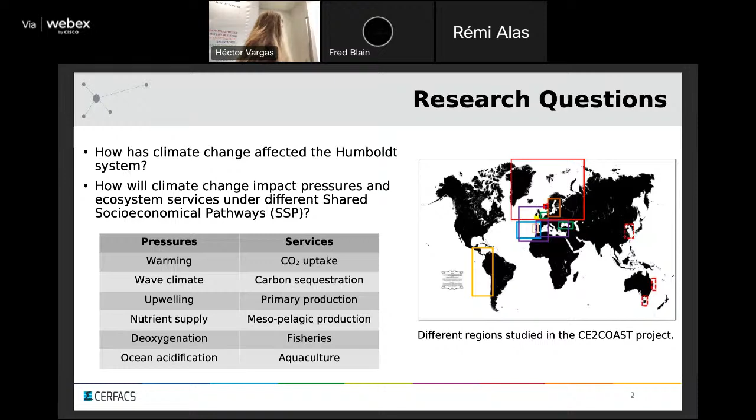Finally, I'm going to show you some more recent results on CO2 response to ENSO. So what this figure shows is during El Niño extreme events, we have the E index, which corresponds to the Eastern Pacific index, and CO2 partial pressure anomalies.

These data correspond to the CESM-LENS ensemble models, 35 different realizations. So what we have in the solid line is the ensemble mean, and the shading corresponds to the 25th and 75th percentile of the distribution. As we can see...

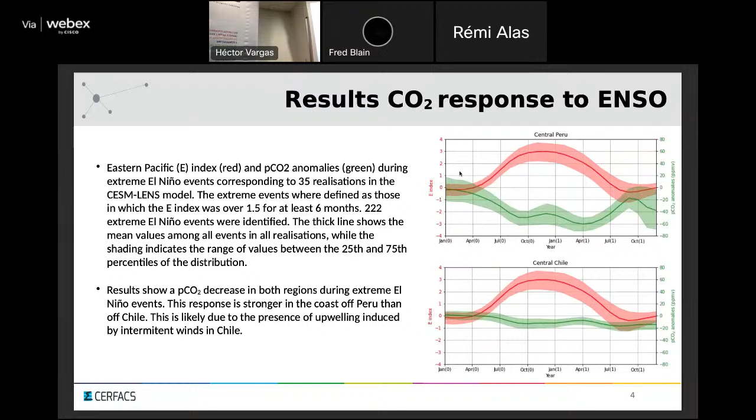During El Niño extreme events, CO2 concentration decreases, as we would expect since upwelling stops. However, we see that this reaction is stronger in Peru than in Chile, and this is most likely because in Chile there are intermittent winds that still induce some upwelling. And so this is the end of my presentation, thank you for your attention.

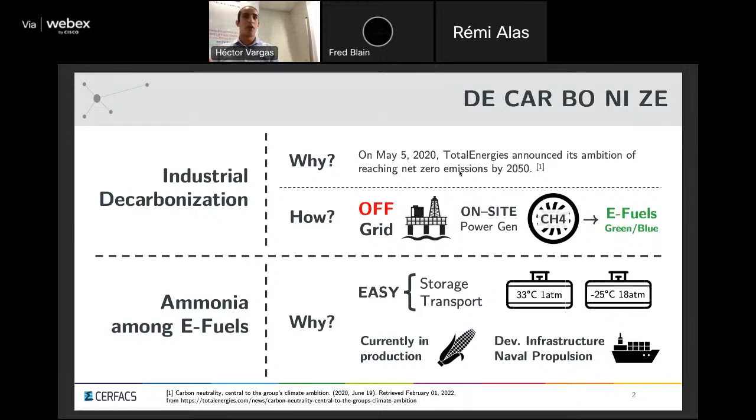And how do we do it? We need to transition from methane to ammonia-hydrogen mixtures. How do we do this? Well, first, one of the first challenges we face is that the literature on ammonia and hydrogen is scarce but very active, so there are papers coming out every 2 or 3 weeks, but we don't have a history. We are setting the foundation in the last years.

Another thing is that we need to choose a mixture, because as Jessica told us earlier today, you cannot burn ammonia by itself, it's not reactive enough. So you need to mix it with more reactive fuels like methane or hydrogen.

So you have 2 options. You already have a fleet of turbines existing on the platforms, so you can either reuse them and adapt them, or you can redesign the whole turbine.

If you decide to reuse the ones that exist already, you have 2 conditions. You have to reproduce the methane behavior, and you also need to have a mixture issued from cracking NH3. Cracking is a procedure where you take a certain amount of ammonia, crack it, and convert it into an ammonia, hydrogen, and nitrogen mixture.

When you want to retrofit your gas turbines, you have to take into account these two parameters. And if you redesign completely your turbines, you can get rid of the reproducing-methane-behavior constraint, but you need to pay the price to replace all the existing turbines.

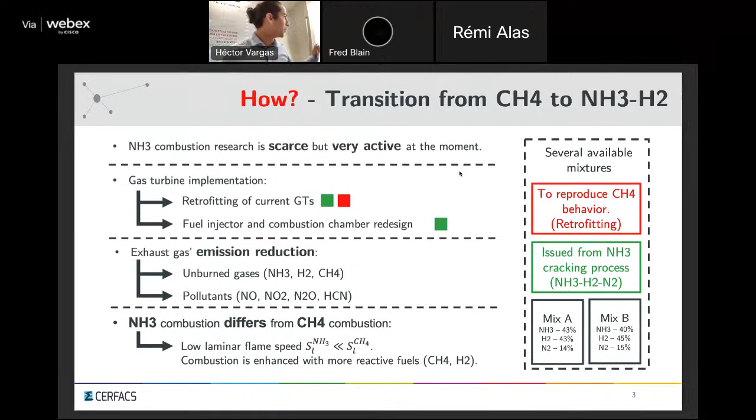My current objective is to implement a chemistry into our CFD LES code, which will be valid for several compositions, several pressures and initial pressure and temperature. We will study the transport of the species and the reaction between them. After validating the models, we will choose the one that's more adapted and suits us better.

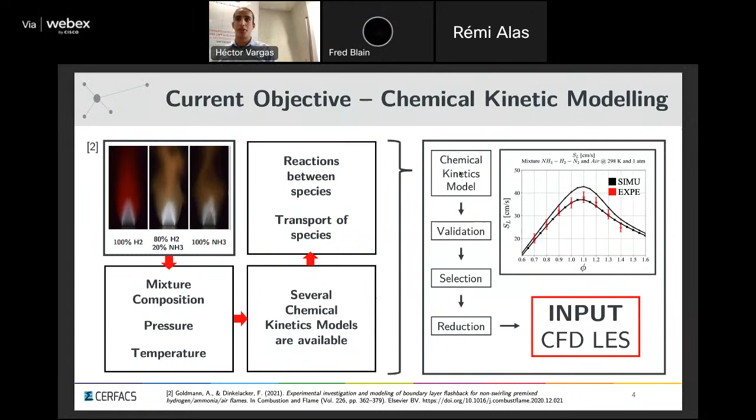Then we will reduce it. We will take out the reactions that aren't that important, that do not contribute to the combustion details we want to capture. And then we will introduce this reduced, simplified scheme into our CFD LES simulations.

After this, we will implement this chemistry and modify the existing turbulence combustion model to take into account our several multi-fuel case.

And we will also analyze the conjugated heat transfer using the AVTP solver. And in the end, we will end up with an adapted version of the AVBP solver and a demonstration of our model in a real configuration.

Which will be then used by TotalEnergies to decide whether they want to keep their turbines and adapt them or buy a new one, or which is the most interesting mixture for them in terms of cost and combustion characteristics.

And the first CFD LES simulations we've done are on a simplified bluff body burner, which we can see on the right side of the slide.

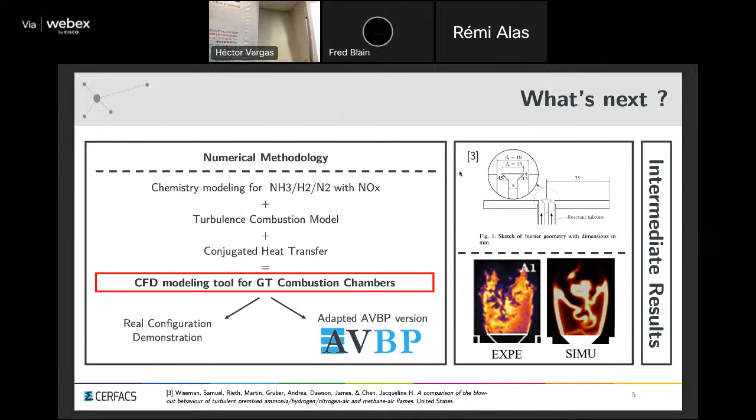Hello everyone. My name is William Montolin. I'm a first-year student at the GLOBC team, and today I'm going to present my topic entitled Improvement of the Representation of Living Fuel for Fire-Atmosphere Coupling. This topic I'm doing under the supervision of Mélanie Rochoux and Patrick Le Moigne for CNRM.

Today we are going to talk about fires, but not the same kind as you CFD guys, but wildfires. Even though wildfires are part of nature, they can be deadly, destroying homes, wildlife, and polluting the air with harmful emissions.

With an increase in temperature and droughts, they are becoming more and more worrying. I showed you here as an example the area burnt between 2019 and 2021 by fire with a surface of more than 40,000 hectares, which we call the mega fires.

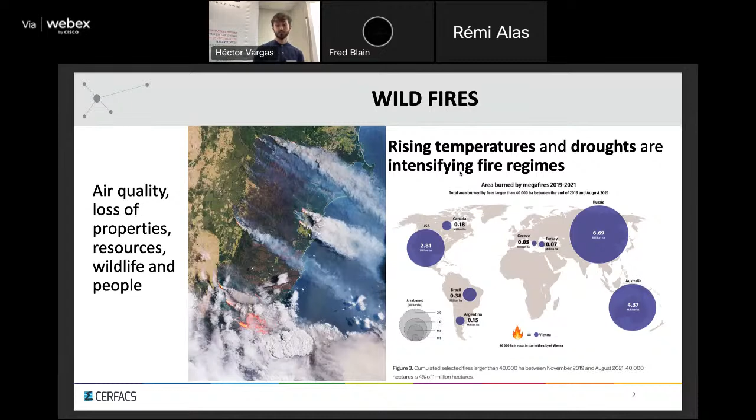These events are out of control for firefighters, and predicting their spreading is not an easy task because there is such a complex and rich physics involved.

Mainly, we are modeling this through the interplay between fire and atmosphere, where you have the fire heating up the atmosphere, giving rise to a strong convective flux. And at the same time the fire is spreading at the ground at a certain speed, and this speed is depending on the surface wind from the atmosphere.

So there are a lot of regimes existing depending on the convective flux number. You can have either a plume-dominated fire or a wind-dominated fire.

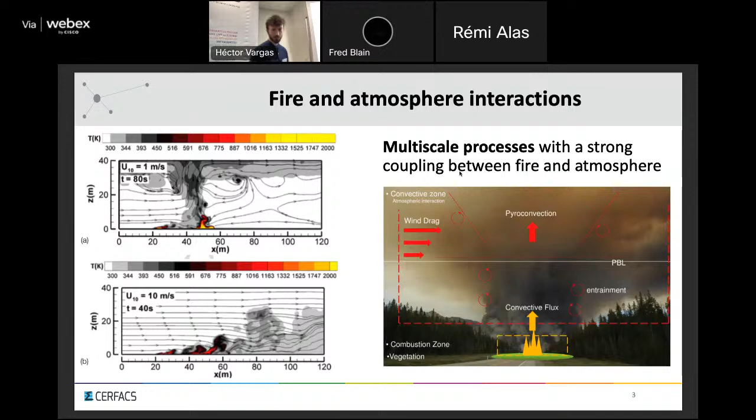By trying to recreate this complex physics, Blaze was developed by Aurélien Coste during his PhD for the fire part. His model was then coupled with Meso-NH large eddy simulation for the atmospheric counterpart. The coupled model Blaze Meso-NH was then compared to an experimental case and showed in particular two things.

One was the importance of atmospheric variability due to turbulence, and the second was the appearance of compressible effects at 10-meter resolution. This was done for a homogeneous vegetation, or fuel, if you want to say.

Our goal during this thesis is to extend this case to a more complex vegetation, to have an even more realistic case. To do that, first we need to correctly represent the drag that the vegetation has on the fire spreading, by representing the type of profile that the wind has.

And secondly, we need to recreate behavior from the fuel depending on the characteristics of the vegetation. With these two ideas combined, it will help us evolve toward more real cases.

Such as this one, which is the New Jersey case, a pine forest with a very broad range of vegetation and complex fuel. Thank you.

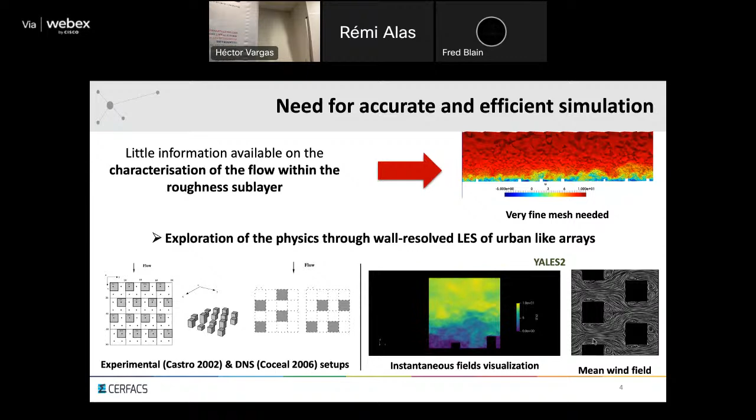Now that we know our tool is working well, we are focusing on finding the relevant variables which are influencing our flow. Of course, as you can see, the pattern of the array is one of them, but we can also think about the wind direction, the form of the obstacle, the density of the obstacle inside our domain, and I bet you can think about many other things.

We aim in this PhD at taking advantage of such a high variable space and complex flow pattern using neural networks and random geometry databases to create a wall stress model of the roughness sublayer, and maybe later to extract the dynamics of the flow to provide accurate prediction of pollutant dispersion.

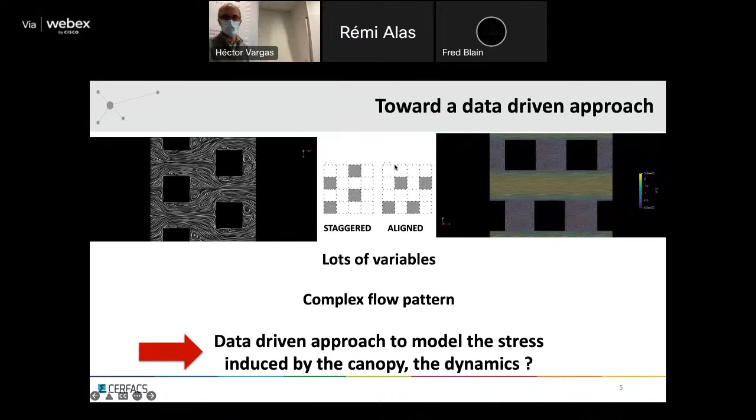Thank you. We now go back to Mehdi. So we talk about wall modeling again.

Hello everyone, my name is Emilio Concha. I'm a first year PhD student here in the CFD team, and my topic is wall modeling for large eddy simulations of turbulent flows. So a bit of context.

So I'm dealing with large eddy simulations in which we need to simulate the largest and most energetic structures of the flow. However, one limitation is that when you are nearing the walls, the structures you need to resolve are smaller and smaller. So it calls for a fine enough mesh, and that means a high computational cost.

One way to avoid it is to use wall models that will model for you the fluxes at the wall. Then you can compute on a coarser mesh, and it avoids a lot of pain for you.

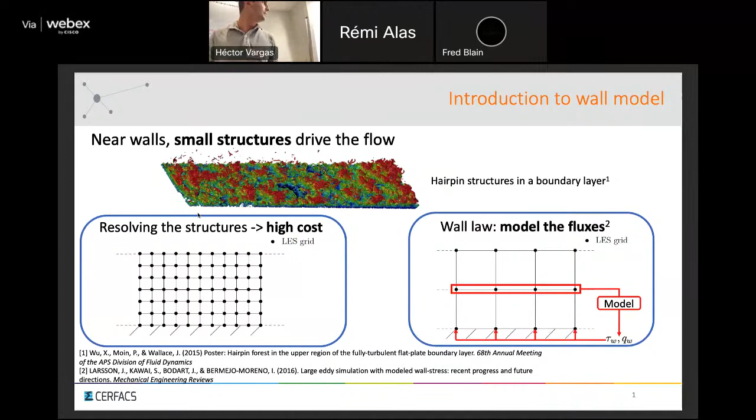However, the challenge we have is that here at CERFACS, we want to model quite complex flows, such as turbomachinery flows, and there are complex phenomena at stake. For example, there is pressure gradient in the boundary layers. Also, they can have shock-wall interactions and boundary layer transitions, and most of the phenomena are also non-stationary.

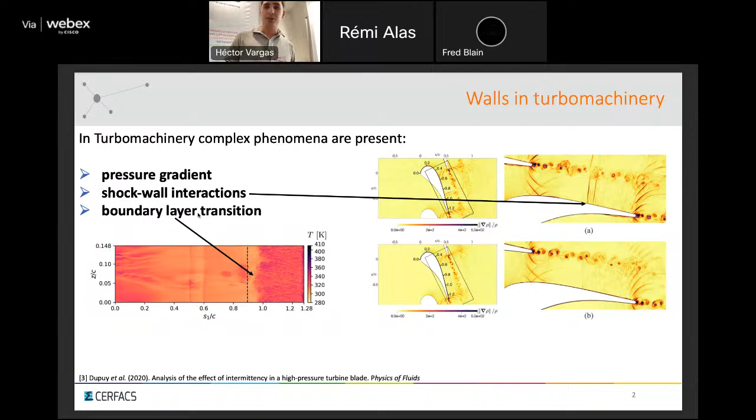One contradiction is that the most widely used wall law is based on the classical and historical log law, which relies on restrictive hypotheses, such as flat plate, stationary flow, and no pressure gradient. However, it is quite efficient to compute with, so it's still used.

But the whole idea of my PhD is to try and improve this law in our solver AVBP, and we hope to have better predictions for our turbomachinery flows with that.

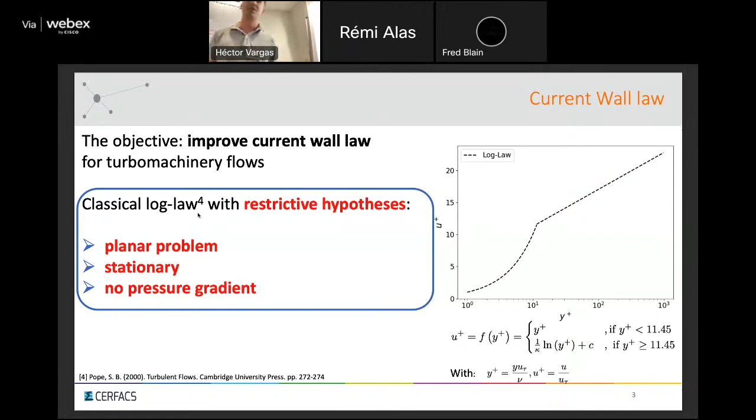So what I did up to now is I implemented in AVBP the thin boundary layer equation model, which relies on solving an ordinary differential equation in the first cell of the mesh. And it has a pressure gradient embedded in it.

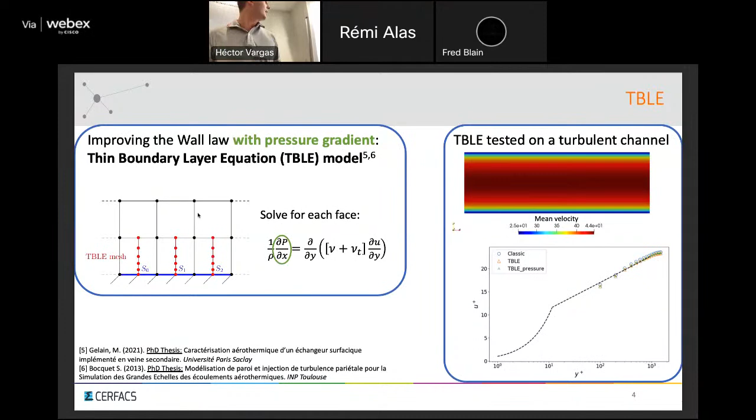For now, I tested it on the turbulent channel just to know if it was behaving as we wanted it to in a controlled environment. And that's the case. The work in progress is trying to test the TBLE model on a diffuser case or other cases where the pressure gradient is known to have an effect on the flow.

I'm also trying to see if other wall models can be considered, especially trying to include the non-stationary effects in the models to better couple the LES framework with the wall models, which are based on RANS equations now. So that's all for my talk, and if you have any questions, you can ask them.

Next speaker is Rashid, and you will be talking about hybrid physics AI approach for cloud cover.

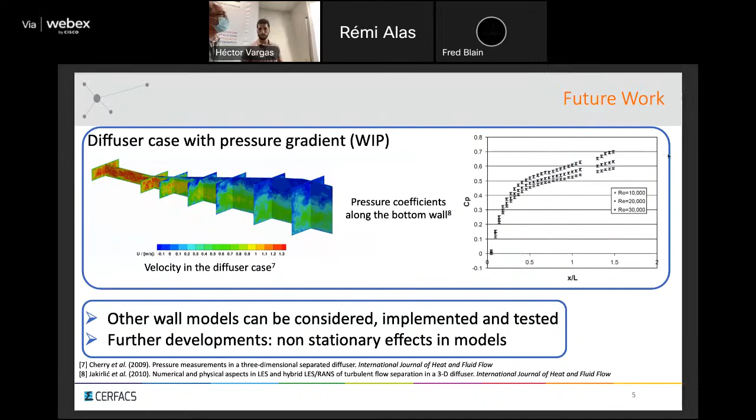Hello everyone, my name is Rashid Elmontosir, and my PhD subject is hybrid physics AI approach for cloud cover nowcasting. I'm supervised by Olivier Pincourt and Corentin Lapayette.

The idea of cloud cover nowcasting is given the last observations, to predict the next cloud states. Oh, it's not working, it's an animation. Anyway, it's actually an animation, but anyway.

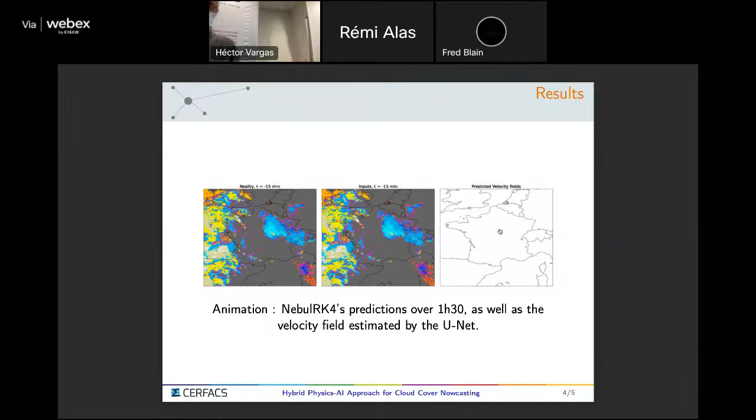So the next and final talk for this session is Riwan, right? That's how you pronounce it. So it's about control of laminar transition.

So the industrial interests of this topic are the reduction of fuel consumption, especially for civil aviation, and the reduction of thermal protection constraints for future hypersonic aircraft.

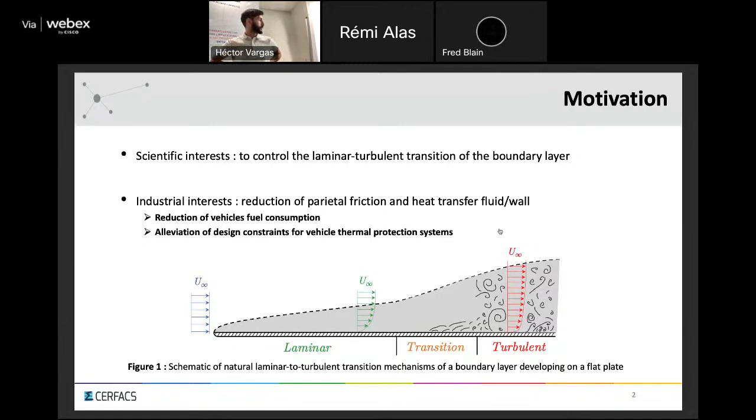The natural transition of a boundary layer consists in the linear development of primary instabilities until certain amplitudes, past which nonlinear interactions become predominant. The so-called secondary instabilities then lead to the breakdown to turbulence, that's to say the apparition of turbulence spots that grow and multiply until the boundary layer becomes fully turbulent.

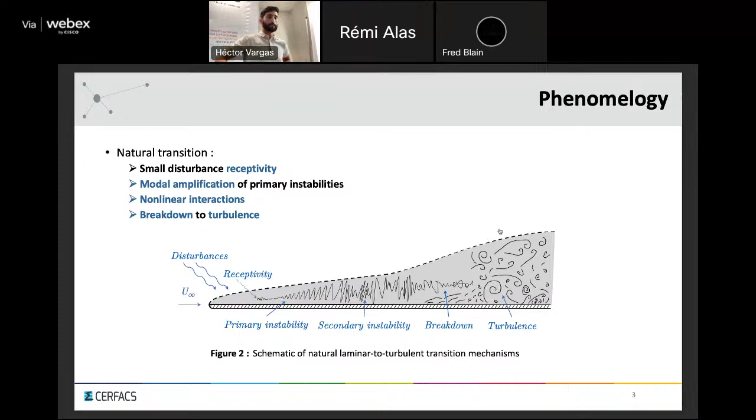Consequently, the attenuation of these primary instabilities can allow us to delay the transition. To achieve this attenuation in the subsonic regime, we can use suction through a perforated wall. This will make the boundary layer profile fuller and less prone to destabilize the Tollmien-Schlichting waves in this flow regime.

For the hypersonic regime, it's different. The second Mack mode is the dominant disturbance that can make the boundary layer turbulent. This disturbance represents a high frequency trapped acoustic wave within the boundary layer.

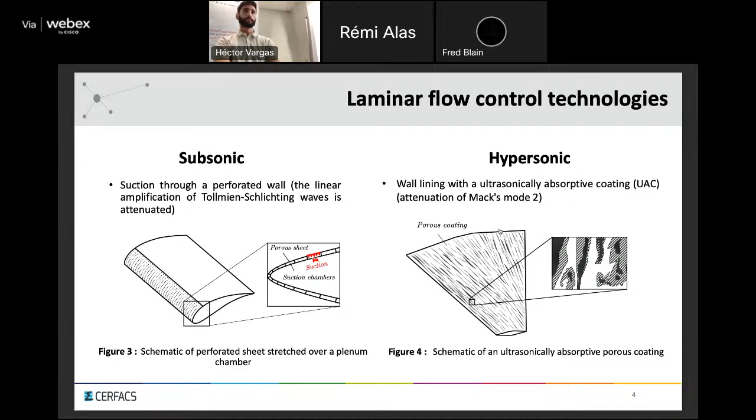The resonant nature of these instabilities is sustained by the wall acoustic impedance. So covering the wall by a porous coating can allow us to delay the transition by attenuating the Mack second mode through absorbing the acoustic energy.

So the objectives of this thesis are to study the modal and nonlinear amplification of instabilities within subsonic and hypersonic boundary layers by performing DNS with Jaguar.

Then we want to assess the effect of control systems on the development of instabilities by modeling the effect of porous walls with temporal impedance boundary conditions, and eventually couple this boundary condition with wall suction for subsonic cases.

And then we want to improve the performance of control systems by using optimization algorithms to evaluate the properties of especially inhomogeneous porous materials. Thanks for your attention.

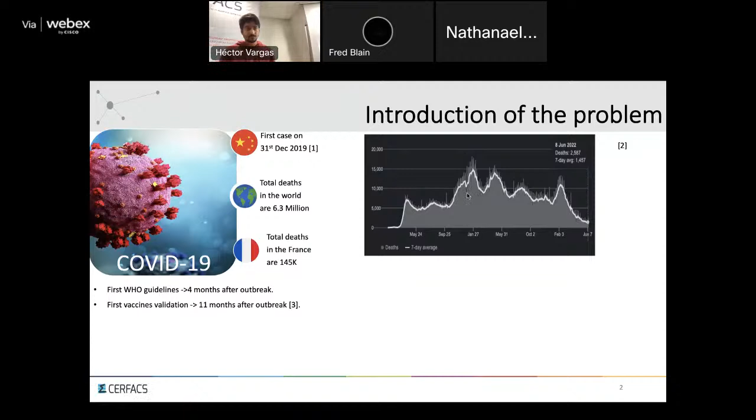So why did this happen? Is this the first time we had a pandemic with an airborne virus? Not exactly, because we had some airborne viruses in previous history which were catastrophic for mankind, such as rhinovirus, influenza, and human SARS, etc. There are actually studies on these. Despite having studies, we still came up with this current situation. Then what is the problem?

The problem is that the World Health Organization, actually the entire world, reacted to the situation. They did not come up with a proactive approach based on previous history. A proactive approach is basically coming up with a way to prevent virus propagation already. In order to do this, we need to know how airborne viruses propagate. First, they propagate in 2 ways: direct exposure or indirect transmission. In this PhD we are talking more about indirect transmission between infected and non-infected humans. To do this, we have to do a detailed study on the respiratory droplets, and also a detailed study on environmental effects.

So let's get into it. Did you know that if, for example, I suddenly cough or sneeze, the droplets I emit will have a speed of 5 to 20 meters per second? And with the correct weather conditions, it can travel up to a distance of 20 feet - so basically you all will be infected. The size of these droplets also ranges from 0.1 microns to 1,000 microns. We are mainly focusing on the microns which are suspended in the air, and the lifetime of these suspended aerosols in air is approximately 2 hours, which is scary.

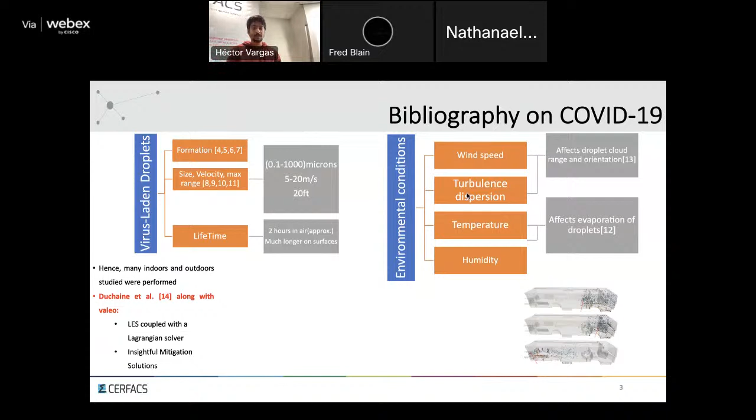Hence, the studies done on COVID or other airborne viruses can be divided into two parts: indoors and outdoors, and we will be working only on indoors. We have several works on this, one being by Florent Duchaine with Valeo, who simulated how droplets travel from an individual placed in different positions and how they propagate throughout an entire bus.

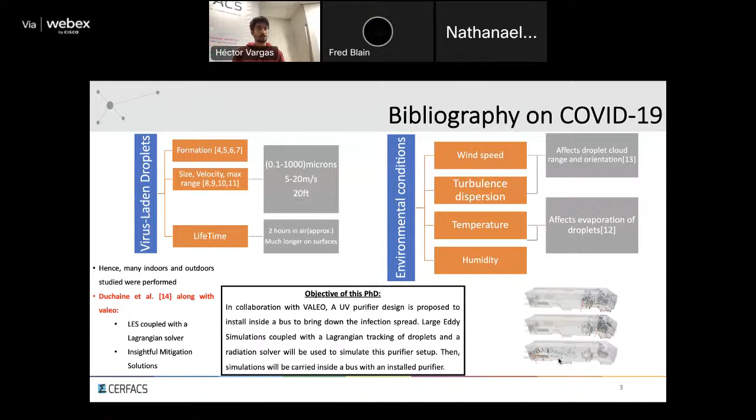The objective of this PhD is to come up with a mitigation solution to prevent this propagation inside a public transport like a bus, for example. To do that, we collaborated with Valeo, who provide a UV Purifier design, which is the solution we are using to prevent the propagation.

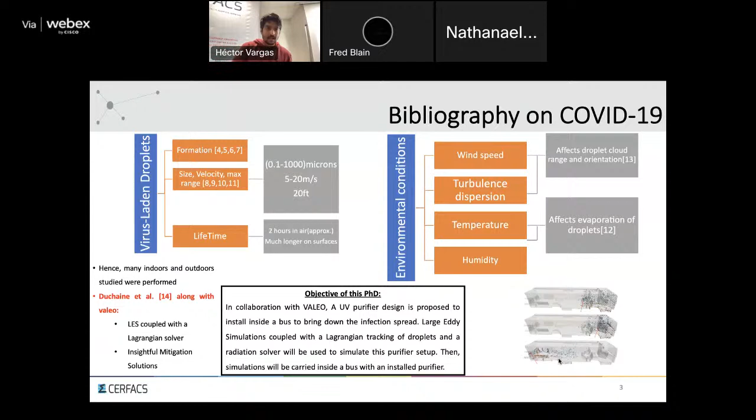You might wonder why we are going with UV. It's basically because UVC radiation, also known as germicidal radiation, can kill COVID. There are already studies showing that it can kill COVID.

To find out the efficiency of the UV purifier, I need to do a high fidelity simulation that accounts for all the phenomena I mentioned before. I need to understand the flow field inside the purifier, inject and track particles, add a fan model because we have inlet fans so the spiral motion needs to be considered, and also a radiation solver since we are using UV bulbs.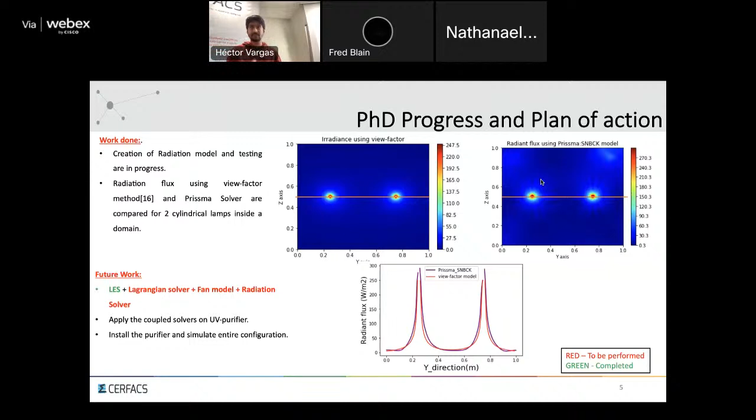With this, I would like to say that the work I'm doing is I'll finish this radiation model. I'm currently running LES coupled with a fan model, and we will be running with a Lagrangian model. We'll combine all this, run inside a purifier, and see how efficiently we can kill the virus. Then we install these purifiers inside the bus and see how we are preventing it and how it is a mitigation solution. And with this, I conclude. Thank you.

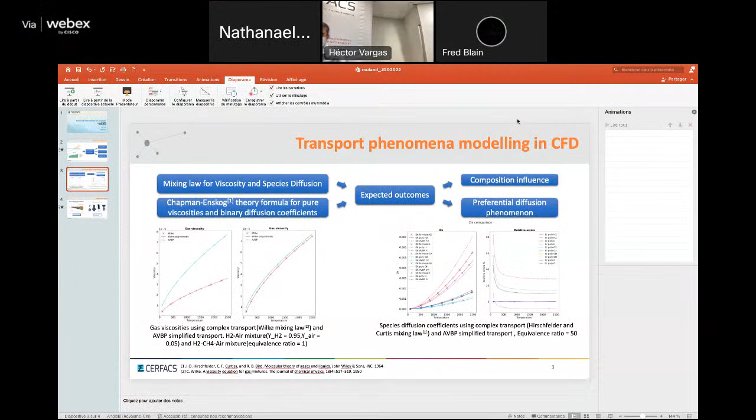So, sorry, Marcus. Nathanael? Yes. So the second speaker is Nathanael Rouland, and the topic is modelization and simulation of enriched hydrogen turbulent flames. So up to you, Nathanael. Okay. Is everybody seeing my screen? It's good? Yes, but yes. Yes, everything. No, change the screen. Ah. Uh-huh. That's right. That's okay. Good? Yes. Okay.

Yes, so hi everyone, sorry not to be here. In fact, the reason is directly related to what we've just heard. I'm Nathanael Rouland, a first-year PhD student in the CFD team, and I will introduce my PhD topic, which is simulation and modeling of turbulent flames enriched with hydrogen, supervised by Benedict and Eléonore Riber.

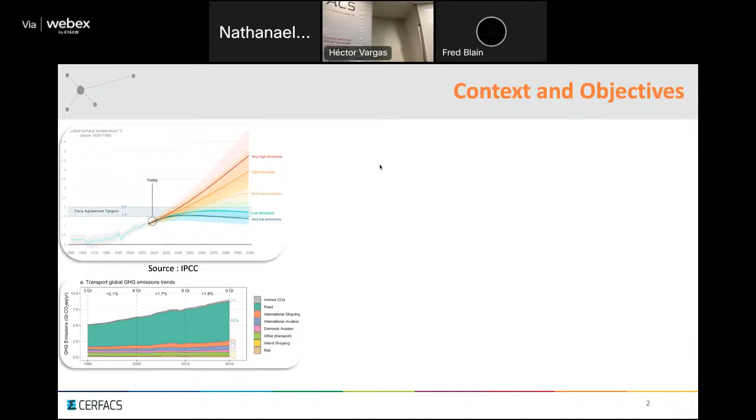So why do we want to burn hydrogen as a pure fuel or mixed with other fuels? I'm not the first to say it today, and probably won't be the last, but we are in serious trouble. The IPCC is categorical: we have to drastically reduce our greenhouse gas emissions. In aviation particularly, even if the simplest way to produce less greenhouse gases is to not use aircraft, if we want to keep flying, we have to learn how to fly without fossil fuel. Setting aside how to produce hydrogen cleanly, how to store it, etc., hydrogen combustion might be one of the solutions.

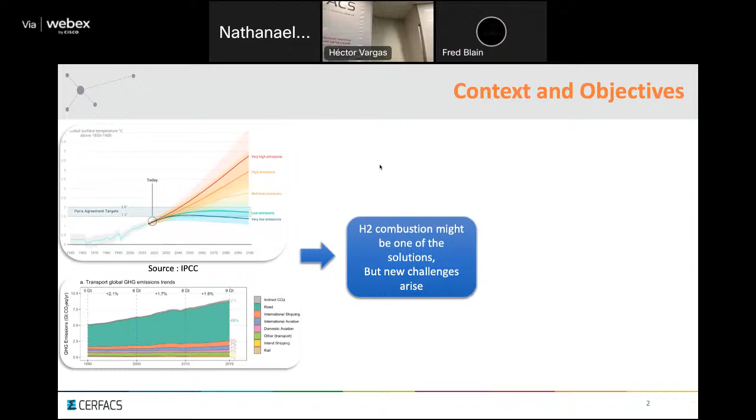But new fuel in aircraft engines meets new challenges. Among many others, this thesis focuses on three of them. First, the high flammability and high diffusive nature of hydrogen lead to more flames in diffusion regime, so we have to improve models on that topic. Secondly, in hydrogen mixtures we observe high effects of preferential diffusion and high effects of composition on gas viscosity and species diffusion, so transport modeling becomes crucial, much more than with fossil fuels. Finally, higher temperature flames lead to higher NOx emissions, and we have to be able to predict those emissions.

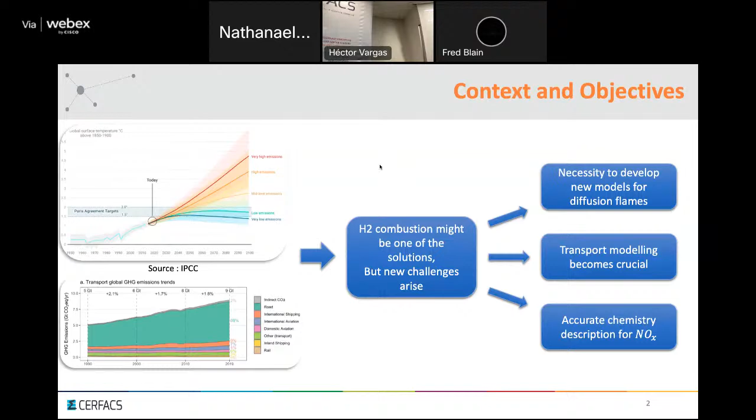During the past few months, I focused on transport phenomena modeling, particularly how to integrate molecular theory of gases into the calculation of transport properties in our code. To do that, we use a mixing law for viscosity and species diffusion, and the expressions of pure viscosities and binary diffusion coefficients are derived from the kinetic theory of gases. These formulations allow us to account for composition influence and preferential diffusion phenomena, and this will be available in AVBP next month. For instance, on the left you can see plots showing the difference between the current evaluation of viscosity in red and the complex one in blue for different mixtures.

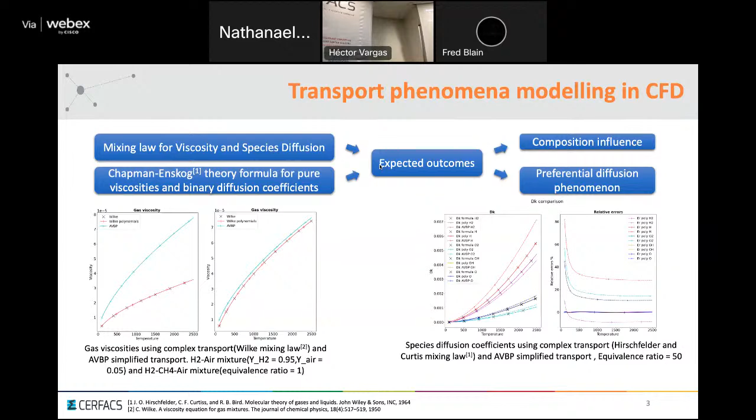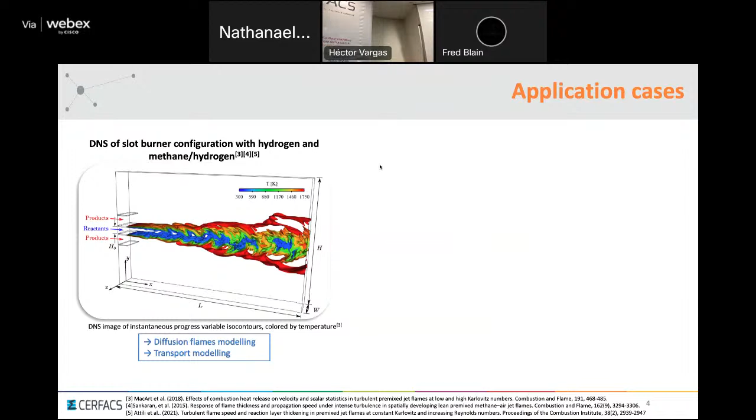In order to test the different models, I will mainly study two cases. The first is a slot burner configuration, where you inject the reactant in the center and the products on each side. The second will be the hydrogen injector currently developed at IMFT. Okay, thank you for your attention.

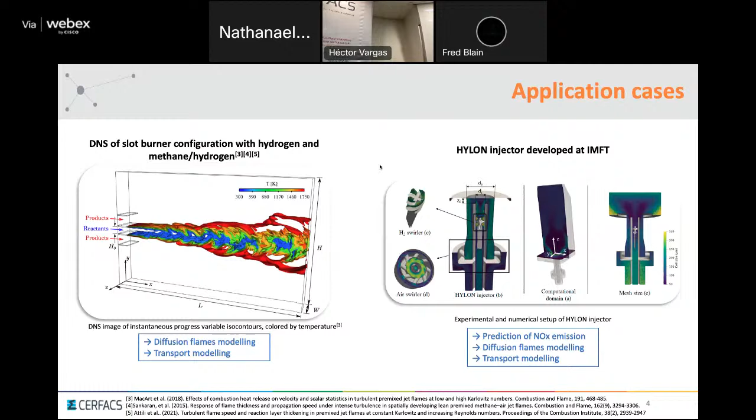So the third speaker is Marcus Holzer, and the topic is code generation in a lattice-Boltzmann framework for exascale computation.

Hello everyone, my name is Marcus Holzer. I'm a first-year PhD student, and my topic is code generation in the lattice-Boltzmann framework for exascale computing. The work is together with CERFACS and FAU. Basically, the problem I'm facing is that supercomputers nowadays become more and more complex and also more heterogeneous, so we have a problem with performance portability, which is a major target for modern HPC systems. Looking at the top tier supercomputers at the moment, we have, for example, the Frontier supercomputer, which is powered by AMD GPUs, while other computers have ARM architecture or NVIDIA GPUs.

To make use of this, we approach a code generation approach, which leads to a separation of concerns between model development and actual optimization. The model development can be done in a DSL-like structure, separated from the optimization, which is done in a second stage. Then hardware-specific code is generated, which runs on the specific hardware used in the simulation. The code generated is for the lattice Boltzmann method.

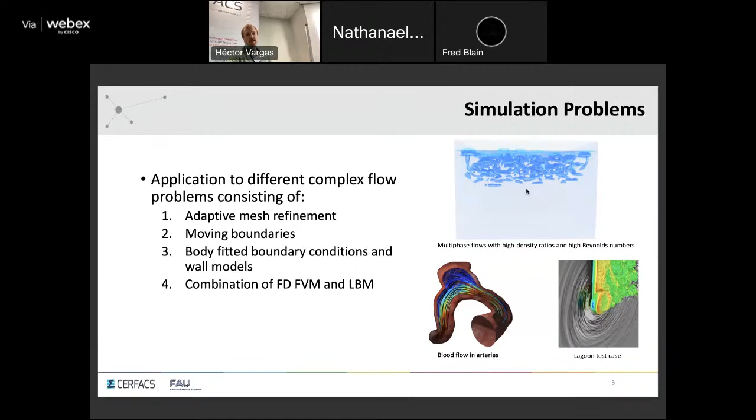The first results I can show now are conducted with multi-phase flows on the former number 1 supercomputer, the JUWELS Booster system in Jülich, and this is conducted on A100 GPUs.

What is also noted here is that we not only try to get performance advancements, but we also always compare with the theoretical peak performance limit, which we evaluate before actually benchmarking the model. From these theoretical assumptions, we compare with the benchmarking simulations, and this leads us to the first promising results.

Thank you very much.

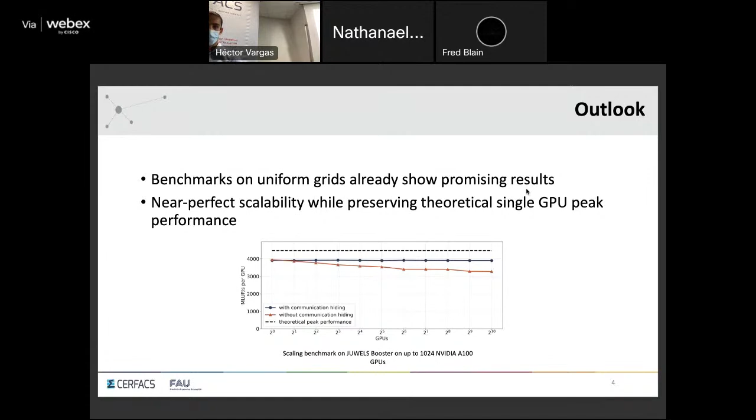Hello everyone, I'm Nicola. I'm a second year PhD student in the CFD team at CERFACS, and I work on large eddy simulation of constant volume combustion. This project is framed in the INSPIRE ETN project, which is a European Marie Curie project.

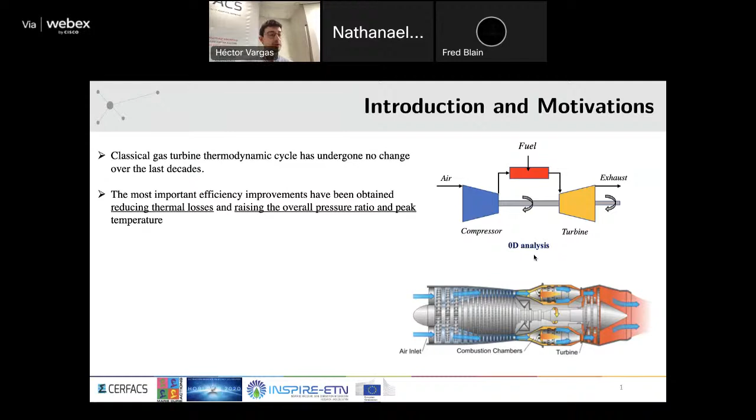As we all know, a classical gas turbine cycle has not undergone major changes in the last decades. The most important efficiency improvements have been done in terms of cooling, overall pressure ratio, and peak temperature. So a technological breakthrough may be needed in order to change the thermodynamic cycle.

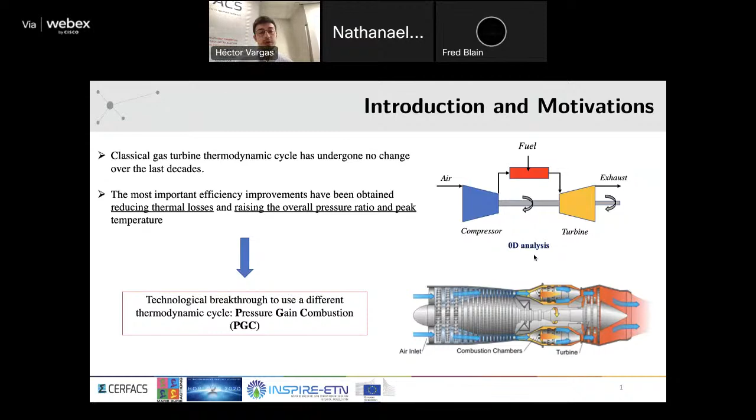And at this point, pressure gain combustion comes into the picture. Basically, constant volume combustion is a concept of pressure gain combustion, and it is a pretty good solution because it does not involve particular issues such as shock waves, and it is characterized by an ideal thermodynamic cycle which is higher than that of the Brayton cycle.

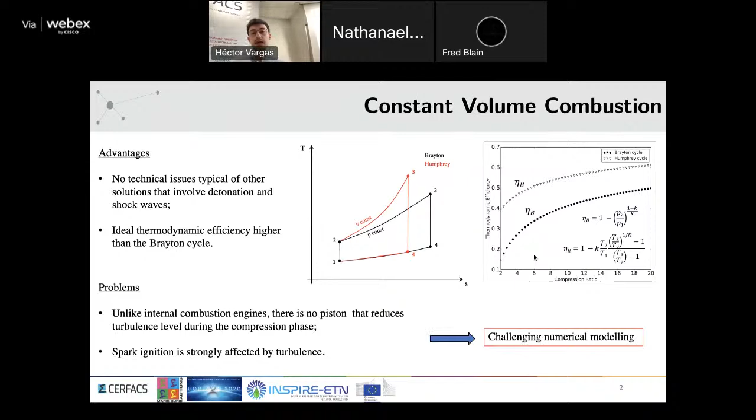Of course this kind of solution has some drawbacks. For example, unlike a piston engine, there is no piston that reduces the turbulence level inside the chamber, and the spark ignition for this reason is strongly affected by turbulence. This kind of combustion chamber is quite challenging from a numerical point of view.

Here's an overview of the combustion chamber I'm computing at the moment. This chamber has already been investigated experimentally at the Pprime lab in Poitiers. Here you can see an intake pipe and exhaust pipe, and the central volume where 4 nozzles let the fuel enter the chamber.

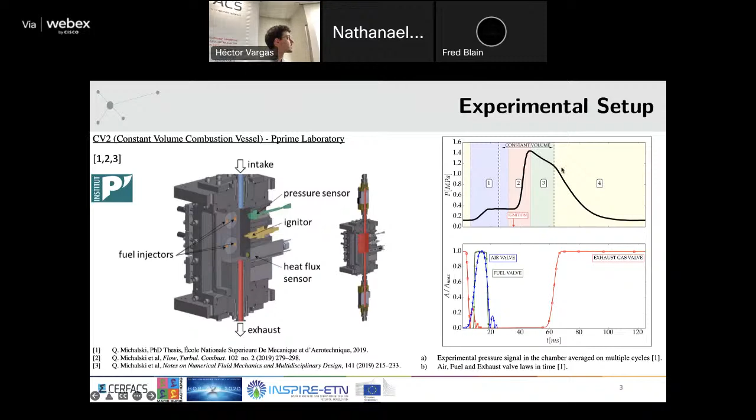Here you can see, for example, the pressure signal inside the chamber, which divides each cycle into 4 different parts: an admission part, number 1, where air and fuel are injected inside the chamber; a combustion phase, which occurs at constant volume; an isochoric cooling phase, where pressure and temperature go down; and then an exhaust phase, where burnt gases are released outside the chamber.

So in the first part of my PhD, we have built a numerical approach using the code AVBP in order to simulate, with a certain fidelity, the 3 main phases of each cycle.

Here you can see, for example, the admission phase, the combustion phase, and the exhaust phase.

In particular, we have built and introduced in the code novel boundary conditions in order to mimic the effect of the valves. We have built a chemical scheme that works at high pressure conditions. We have coupled the energy deposition model used for spark ignition simulation with the TFLES, and we have enabled the TFLES to work with variable fresh gas conditions.

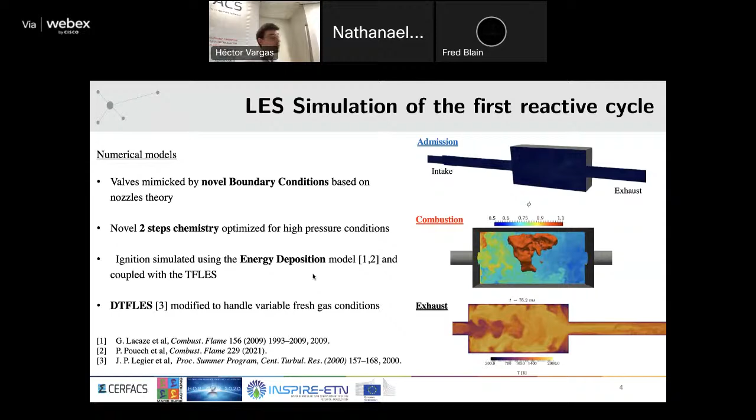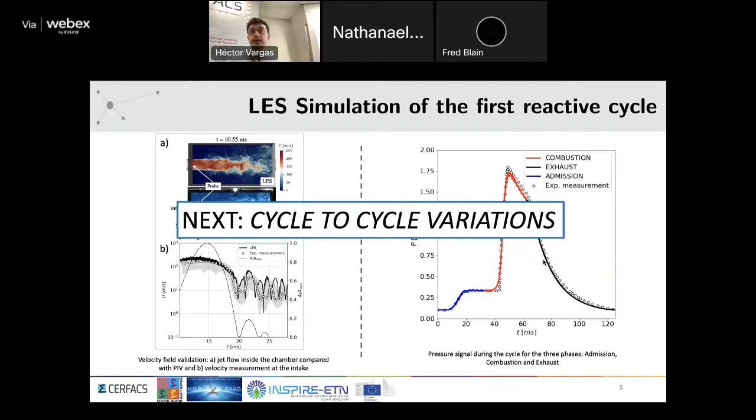Next step is to analyze cycle-to-cycle variations. So the idea is to chain multiple cycles and verify if the code and LES approach is able to evaluate the link and the effects of one cycle on another. Thanks for your attention.

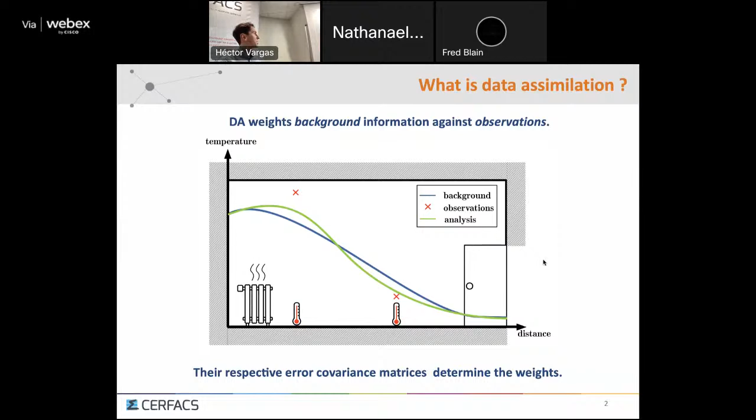Because to do so, you need to characterize your errors properly. And what happens in practice is that beyond what's cool in theory, you have to do some practical code. And when we are working on these systems, these are huge systems. For example, you want to represent the state of the atmosphere or the ocean everywhere on a quite precise grid. So basically, you have systems the size of billions of variables, often.

So you can't do everything you want, and especially it's more convenient. You need to have access to the inverse of the covariance matrix of the observation error. So basically, you have this covariance matrix, which is always taken diagonal in practice, because if it's diagonal, it's easy to invert and it's cheap.

But it does imply some wrong assumptions, because basically, if you have this matrix diagonal, you assume that all your observation errors are uncorrelated. And what happens when you do that? That basically you say my error is white noise. So in a spectral space, it's just constant, the same everywhere.

And this is not true, because in practice, usually with high resolution measurements such as satellite data, if you make a mistake at some point, probably the next observation is wrong as well. And so you would expect this kind of spectrum from the real data.

So what we are doing right now is trying to get this more accurate representation using some numerical tools which allow us to approximate the inverse of some operators at a cheap cost. And basically, the tools are based on diffusion.

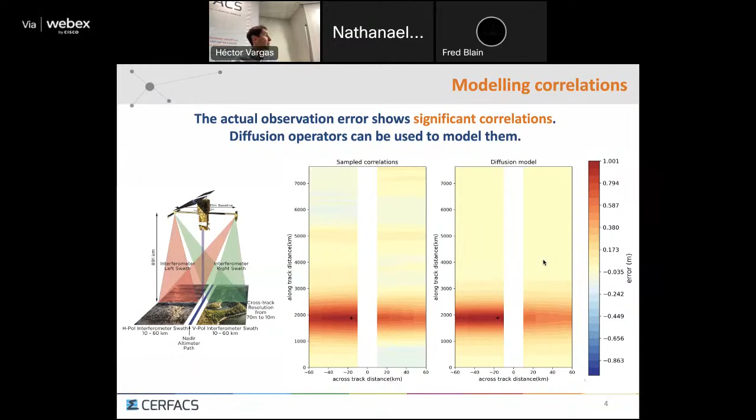Thank you. Thank you.

The next speaker is Alexandre Coudre, and the topic is modeling and simulation of sustainable aviation fuel combustion, including soot production in aeronautic engine conditions.

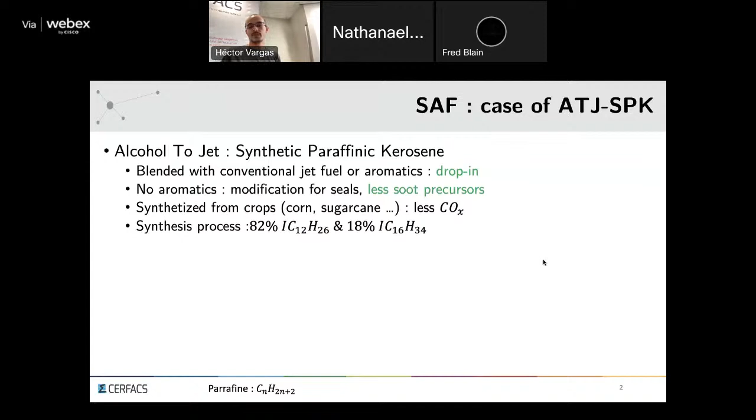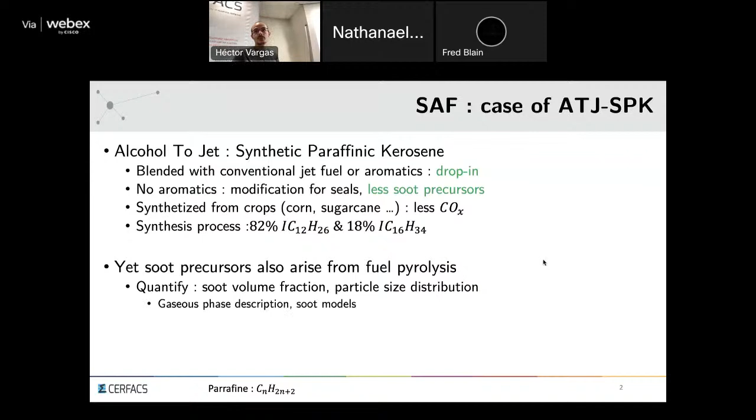Thank you, everyone. My name is Alexandre Coudre, and this is my PhD thesis about SAF and their pollutant emissions. A few words about SAF: one in particular is the ATJ-SPK, which stands for alcohol to jet synthetic paraffinic kerosene. If you blend it with conventional jet fuel or aromatics, it is a drop-in fuel, meaning you don't need a modification in the airplane or the infrastructure to fly an airplane. Without aromatics, you need a slight modification for seals, and you end up with fewer soot precursors because aromatics are soot precursors. It is synthesized from crops such as corn and sugarcane, so you should end up with less CO and CO2 emissions. Because it is synthesized from a well-known process, this fuel has a better known composition than conventional kerosene, so it is easier to model. Yet you can still have some soot precursors arising from fuel pyrolysis, and you need to quantify the soot volume fraction and the particle size distribution, which means you want an accurate gaseous phase description and accurate soot models.

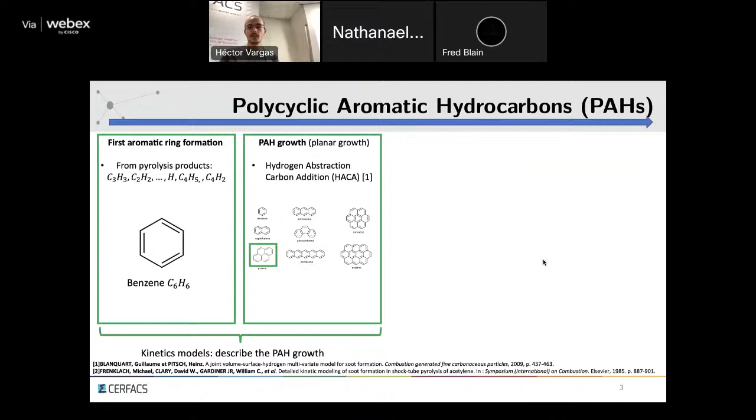A few words about polycyclic aromatic hydrocarbons, PAH, which are soot precursors. They arise from pyrolysis products to form the first aromatic ring, benzene, and through a mechanism of PAH growth, you end up with much heavier, much larger PAH. All of this is described with kinetics models, which generally involve a lot of species you need to transport. Then you have soot models to describe the nucleation, the surface growth, and the oxidation of a soot particle.

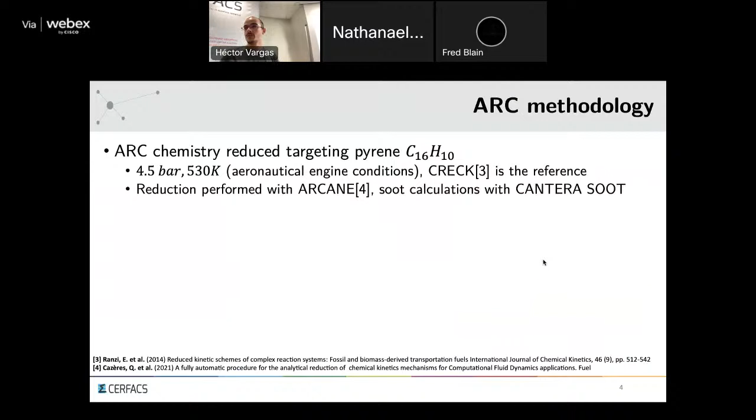So next, on the PAH side, we need additional strategies to describe the gaseous phase, such as the pathway lumping of PAH growth—something we presented at ICNC in San Diego—PAH tabulation, and two-step ARC chemistry, something a bit like NOMAGT. We also ask ourselves: is pyrene suitable as the species used for dimerization? And next, soot models with TFLES and multi-component fuels, basically surrogates.

Thank you. Thank you.

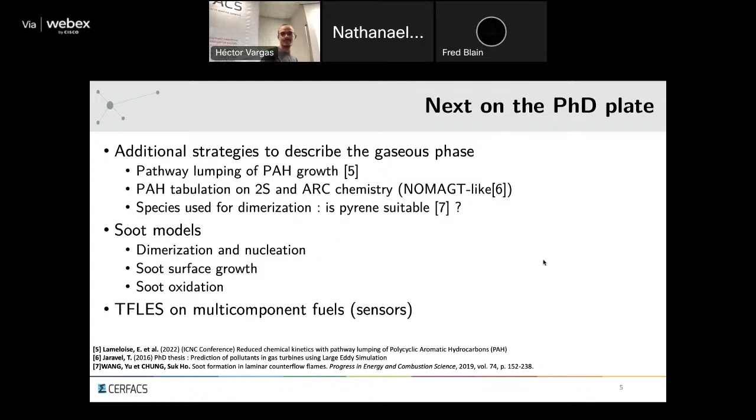The next speaker is Suzanne Salle, and the topic is the impact of climate change on aviation.

Good morning, everyone. I will present my subject, which is the impact of global warming on aviation, and more specifically on the performance of aircraft engines during takeoff. This is my first year of PhD. I am under the direction of Sophie Ricci here at CERFACS and Nicolas Gourdin at ISAE-SUPAERO, and also under the supervision of Emilia Sanchez at CERFACS.

To give you a bit of context, aviation contributes to global warming both through CO2 emissions and non-CO2 effects. This subject is focusing on the inverse problem, which is the effect of global warming on aircraft performance—more specifically, the rise of atmospheric temperature and humidity and how it affects the performance of the airplane. A simple example would be that a rise in temperature gives lower air density and so lower lift force. But in this project, I focus mainly on the effects on the performance of the engine itself.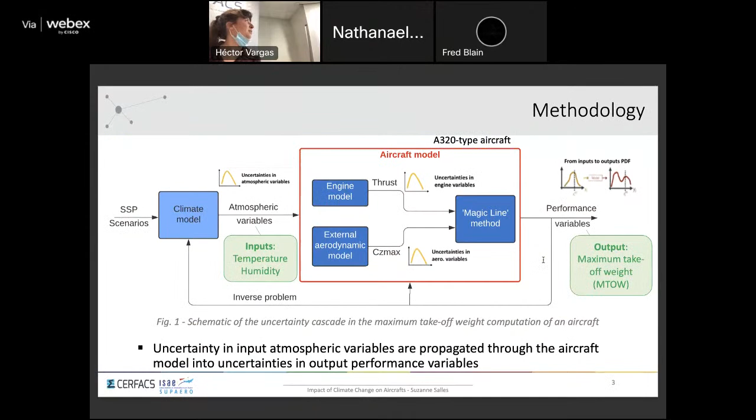So these slides describe the methodology a bit more, but I think I don't have time to go too much into detail. So I'm going to present to you more the main results that I have right now.

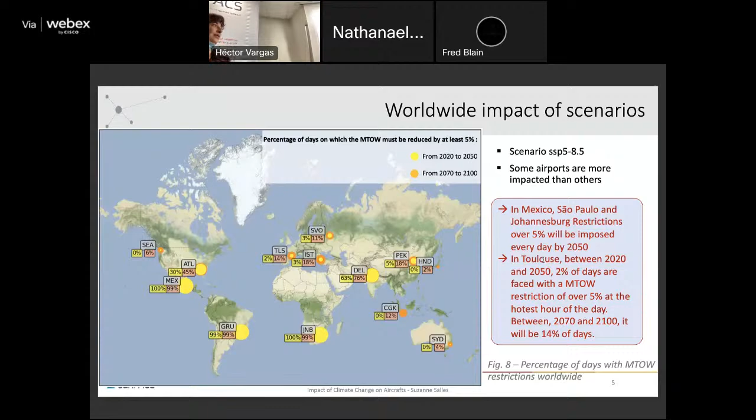So, in conclusion, the MTOW is affected and the aircraft performance is affected by the rise of temperature and humidity. And where I am in my PhD right now is that the methodology and the workflow is basically done, also thanks to 3 different master internships that were done before me in this project.

And now my main objective is to improve each module of the workflow. So for the simulation of the aircraft, it is now based on a 0D model of the engine, which is very low fidelity. My aim is to improve this model so that it represents something closer to reality, still being some 0D simulation, because with sensitivity analysis you have to do a lot of computations. But the idea is to simulate some aerodynamical effects that are occurring inside the engine.

Also, concerning the climate data that I use, I'm only now using the output of one single climate model. The idea would be to do a multi-model approach in order to compare different simulations of climate and reduce the uncertainties on that.

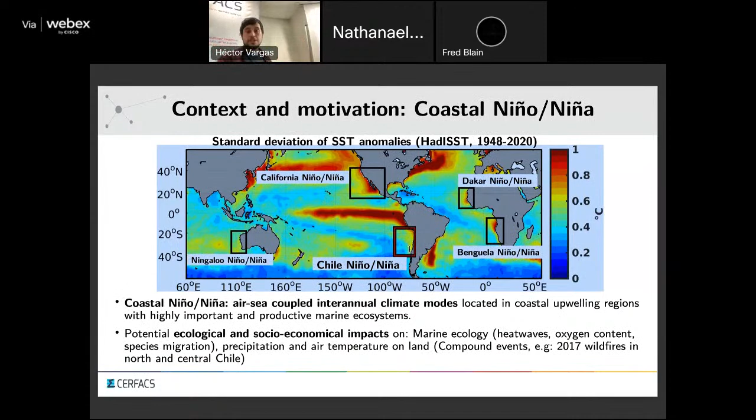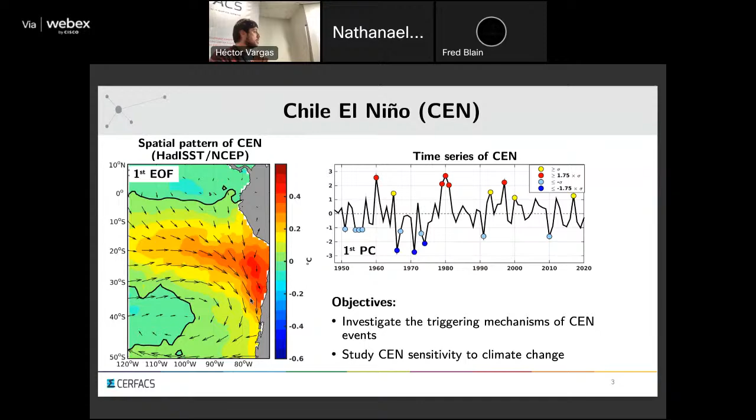Our objectives are to investigate the trigger mechanisms behind Chile El Niño and also to study its sensibility to future climate scenarios under different conditions. To do this, we want to use models from the CMIP project. To start, we evaluate how these models reproduce Chile El Niño events.

So despite the lower resolution that this model had, and also the lack of realism in reproducing upwelling dynamics, the models are quite skillful at reproducing Chile El Niño events. We think they will be a useful tool to study this type of events. Thank you for your time.